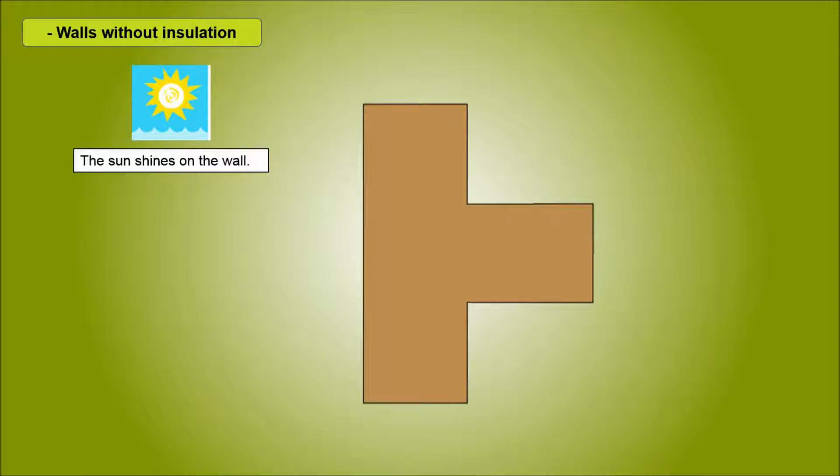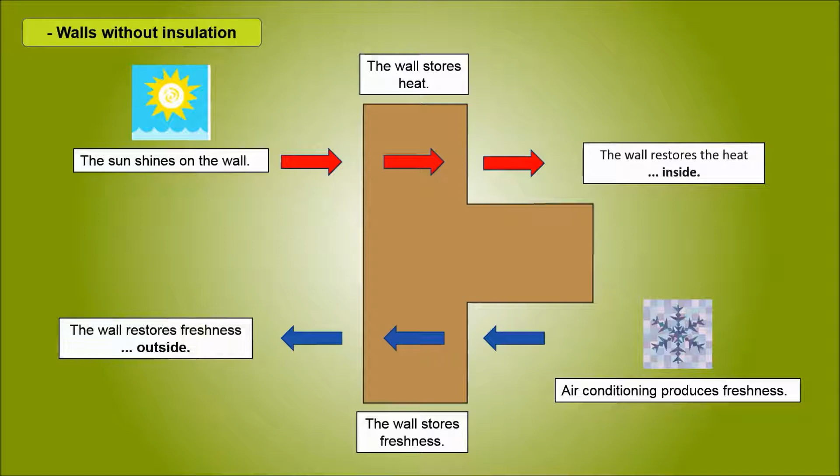Here's what happens with a wall without insulation. The solar radiation hits the wall that stores its heat and restores it into the inside of the building. Conversely, the air conditioning produces cold that will be let into the wall, which in turn will restore it to the outside of the building. That's what we call the thermal bridge phenomenon.

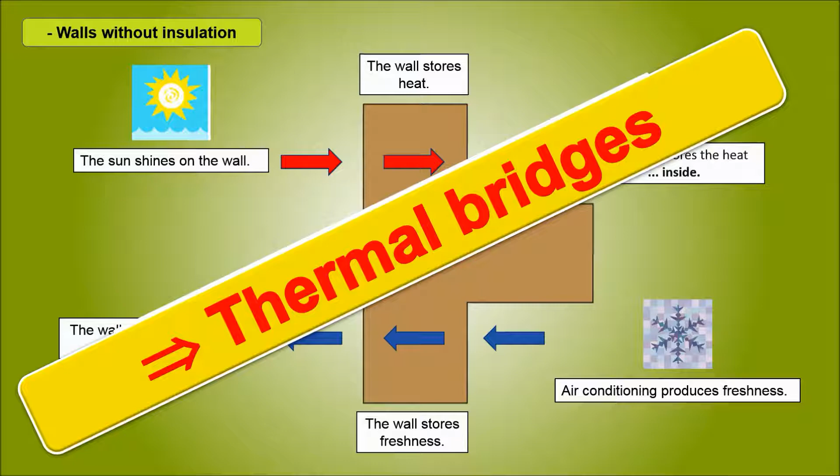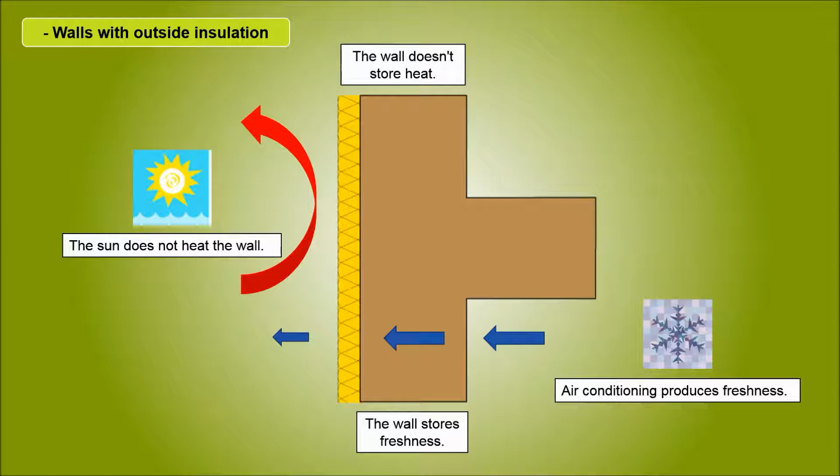So in hot or tropical climate, the building will be warmed by solar radiation and much of the cold produced by the air conditioning escapes to the outside of the building. An absolute nonsense. Outside insulated walls are not hit by solar radiation, but much of the cold from the air conditioning is still wasted and driven out. The phenomenon of thermal bridge is thus attenuated.

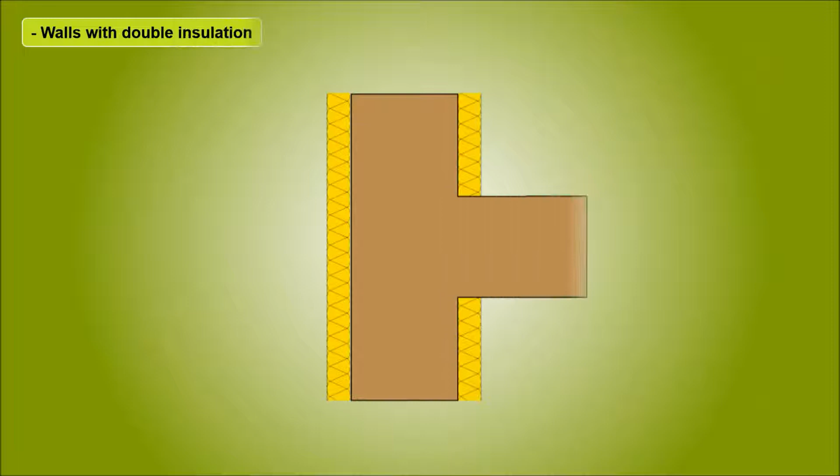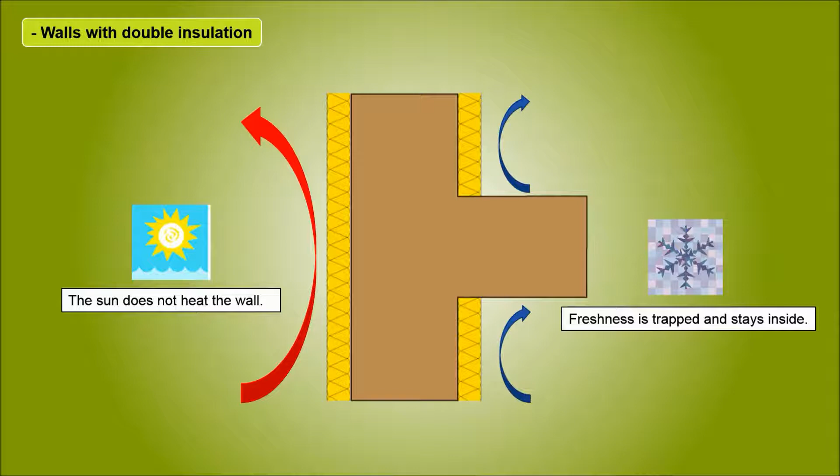With double insulation, outside and inside, the solar radiation does not warm the building and the cold produced by the air conditioning is trapped inside. This ideal building does not know the phenomenon of thermal bridge.

The ultimate goal is to move from a passive building, that is to say, with high energy performances and that does not require heating and air conditioning, to buildings that produce more energy than they consume.

In this perspective, three essential rules must be respected. First, removal of thermal bridges. Second, have walls with high thermal inertia. Third, build airtight buildings with controlled ventilation. Thermal inertia and airtightness, two areas in which the concrete walls are most efficient, better than the brick walls and of course the walls made out of wood, materials without any thermal inertia and absolutely not airtight.

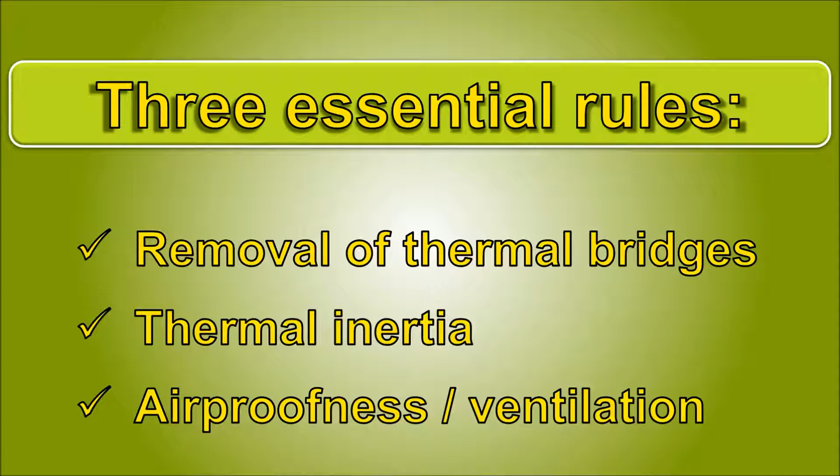Here's a dynamic simulation and a study of the potential of energy savings in air conditioning carried out on buildings located in tropical climate. The chosen geographical location is the city of Chonburi on the shores of the Gulf of Thailand, quite representative for any tropical climate.

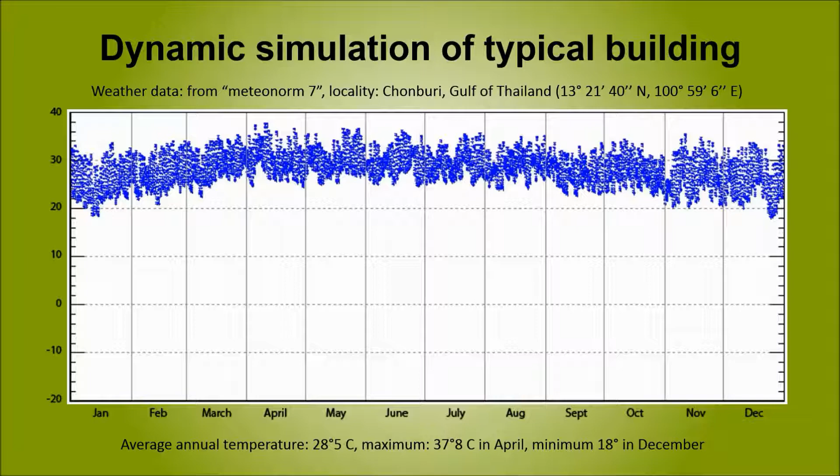We see fairly uniform temperature throughout the year, with a maximum of 37 degrees in April, a minimum of 18 degrees in December, and an average annual temperature of 28 degrees. Vertical solar irradiance is uniform throughout the year.

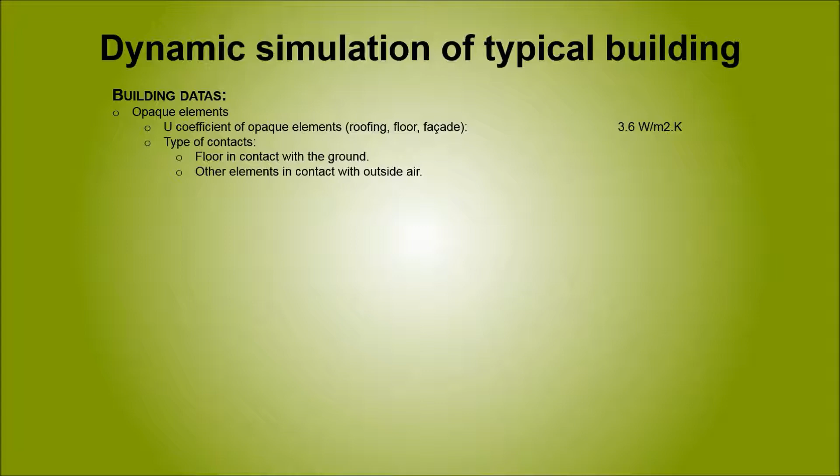All the data of the buildings were taken into account, namely the insulation coefficients of the opaque elements of the envelope and their contacts with the ground and the air, the insulation coefficients of glazed elements and their percentage in the envelope.

Two types of buildings have been studied. The first one, a 10 by 10 meter house with a flat roof, 3 meters high. The second building, a 10 by 7.5 meter house on 2 levels with a flat roof, 6 meters high. And their operating data: the thermal loads of its occupants, appliances, ventilation and so on. All that for a target comfort temperature between 20 and 26 degrees centigrade.

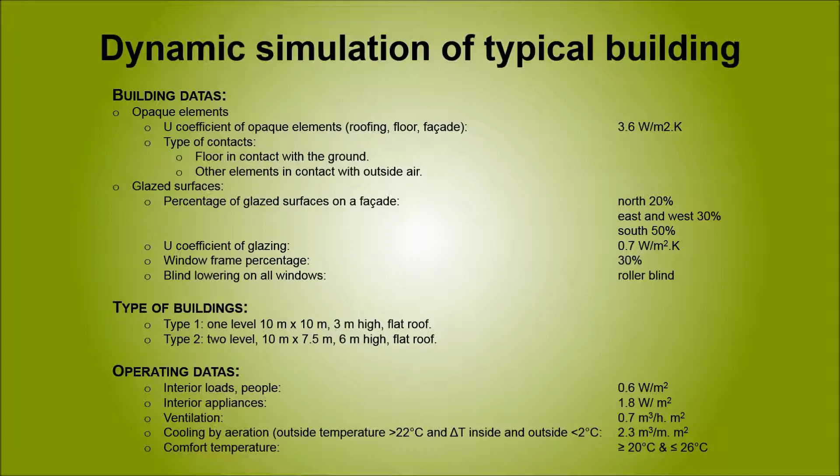A first simulation of a typical building makes it possible to identify the improvement potential of the various elements of the envelope according to their thermal resistance and their respective surfaces. The greatest potential for improvement lies in the facades and in the roof.

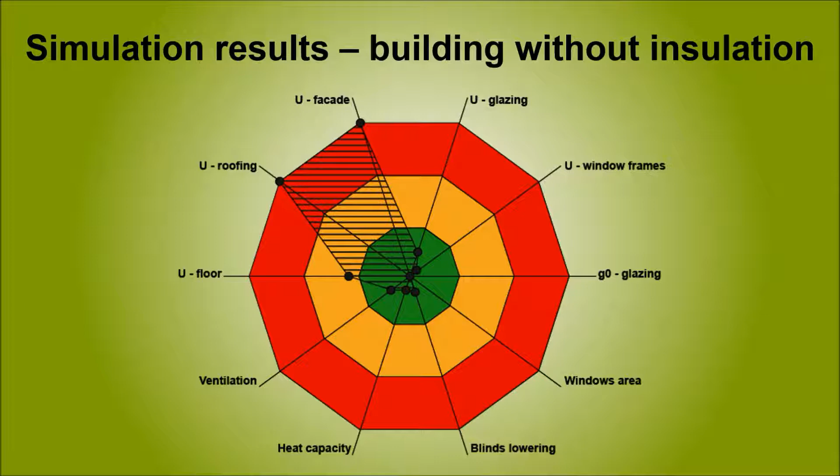For our example, we will take the type 1 building, meaning a house 10 meters by 10 meters, flat roof and one level. It is clear that without any insulation or air conditioning, this building does not consume any energy. Without insulation but with air conditioning, it will consume 100 watts per square meter or 24 liters oil equivalent per square meter.

The insulation of the flat roof will lead to a significant improvement and lowers its energy consumption by 32 to 34%, depending on the thickness of the insulation and therefore its insulation coefficient. The insulation of the facades will also contribute to these energy savings by 25 to 26%, again depending on the thickness of the insulation and its insulation coefficient. The insulation of the floor will reduce this consumption by 6%.

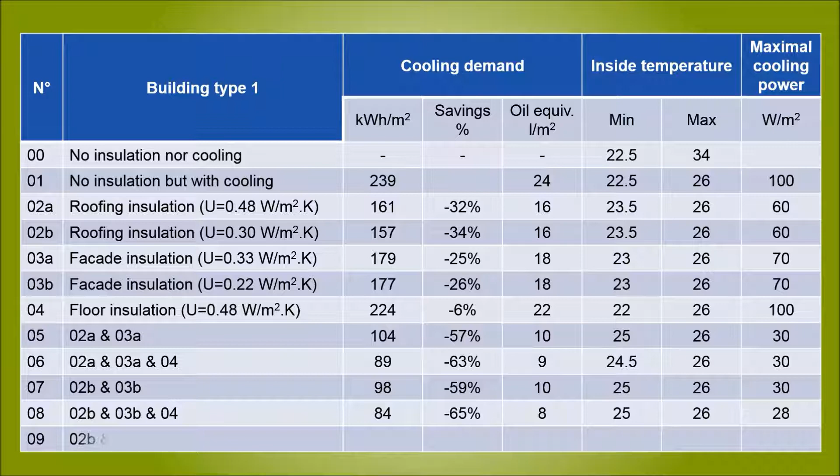The combinations of its insulation elements allow an energy saving between 57 and 65%. Free to the builder or the owner of this building to choose the most relevant combination for its comfort and for its budget, according to the ratio between the investment that the insulation represents and the energy savings on the medium and the long term.

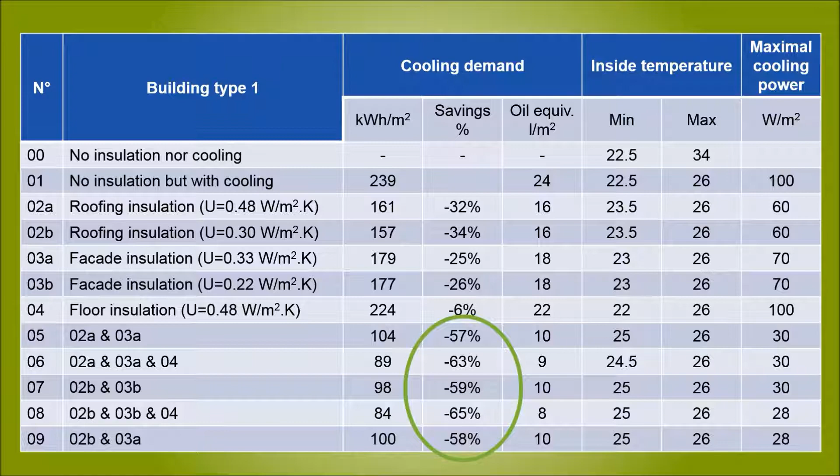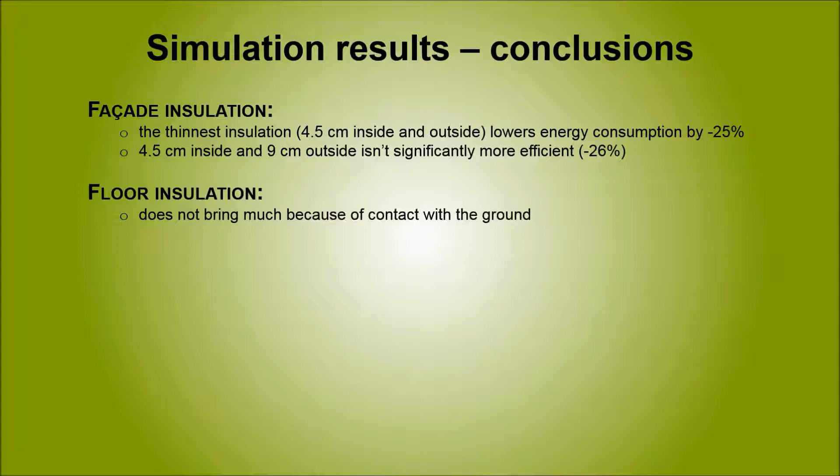In summary, a 4.5 cm outside and inside insulation reduces energy consumption by 25%. A double thickness of outside insulation, that is to say 9 cm, is not significantly more effective. Insulation of the floor contributes only to a small extent because of its contact with the ground. The combination of the insulation of the roof and the facade allow a saving about 60% for a maximum temperature of indoor comfort between 25 and 26 degrees, and the energy consumption of the air conditioning is divided by 3.

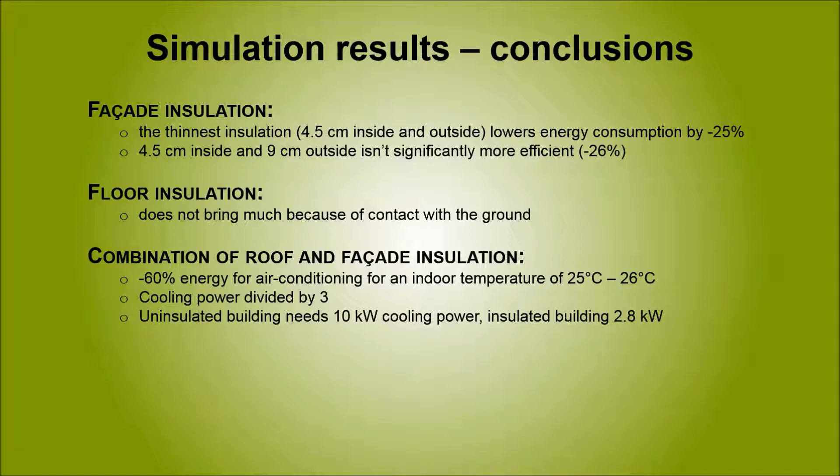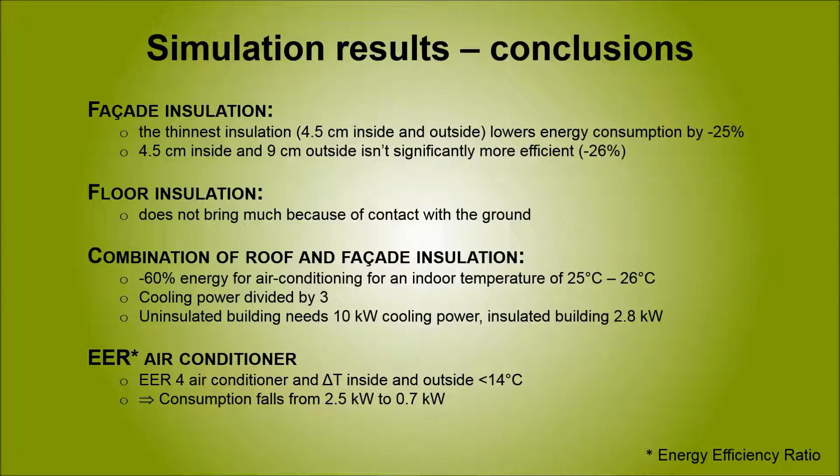An uninsulated building needs 10 kW of air conditioning, a properly insulated house only 2.8 kW. With an energy efficiency index 4 air conditioning system and an indoor and outdoor temperature difference of less than 14 degrees, this consumption drops from 2.5 kW to 0.7 kW. In other words, this building will be able to be air conditioned with the equivalent of the consumption of your hairdryer.

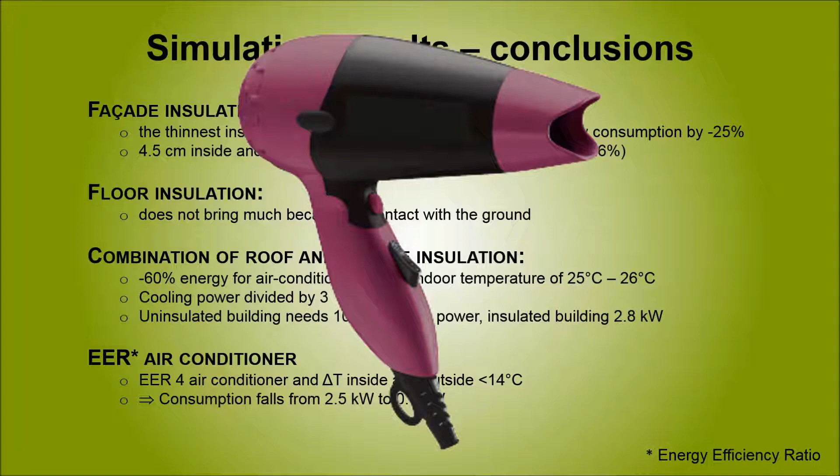For this climate, Euromac 2 offers a 25 cm thick block with 4.5 cm inside and outside insulation and a 16 cm concrete veil. They assemble dry, without glue or mortar, at a rate of 1 square meter per minute, thus significantly reducing labor costs and allowing to go up and pour a floor every 3 days. The dovetail profiles ensure perfect contact and hold between concrete and insulation, between insulation and plaster or coating. The integrated steel structure gives them optimal strength and easy steel reinforcement placement.

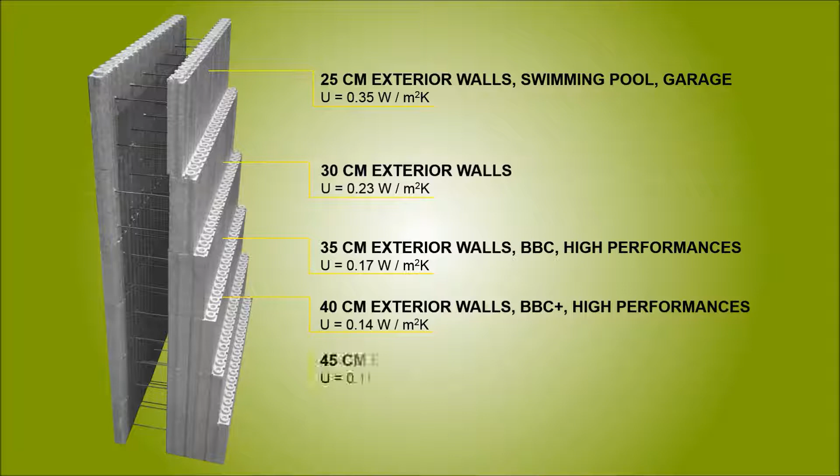Floor-level poured concrete offers excellent thermal inertia, airtightness, and optimum sound insulation. The complete range of Euromac 2 blocks adapts to all climates and uses, depending on the desired thermal coefficient. Euromac 2 is the unchallenged leader for buildings with high energy performances.

Euromac 2 is actively looking for a partner for the manufacture of its product in Southeastern Asia and offers exclusive distribution on the partner's territory, the complete real-world test of machinery and equipment before delivery, collaboration for the market approach, its parameters and local potential, advice for sales techniques, a presence on the internet, marketing and communication, the management of sales forces and logistics, technical assistance for customers, assistance for local certification and regulations, long-term commercial and technical support.

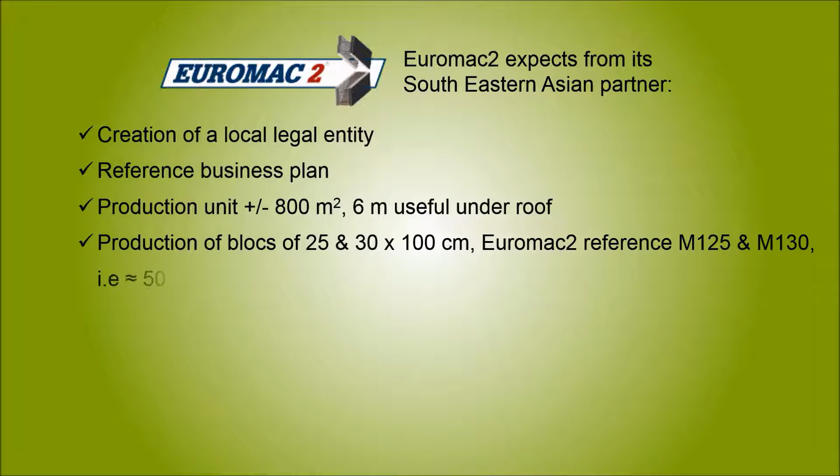Euromac 2 expects from its partner the creation of a local legal entity, a business reference plan, a production unit of more or less 800 square meters on the ground and a useful height of 6 meters. The annual production of blocks of 25 or 30 centimeters on 1 meter for 50,000 square meters of wall, equivalent of 300 to 500 housing units. An investment for the manufacturing unit of 1.5 million euros or 1.7 million US or 39.6 billion dongs. Management of local elements, terrain, infrastructure, regulation, administrative aspects, etc. Active marketing in his territory, royalties on production.

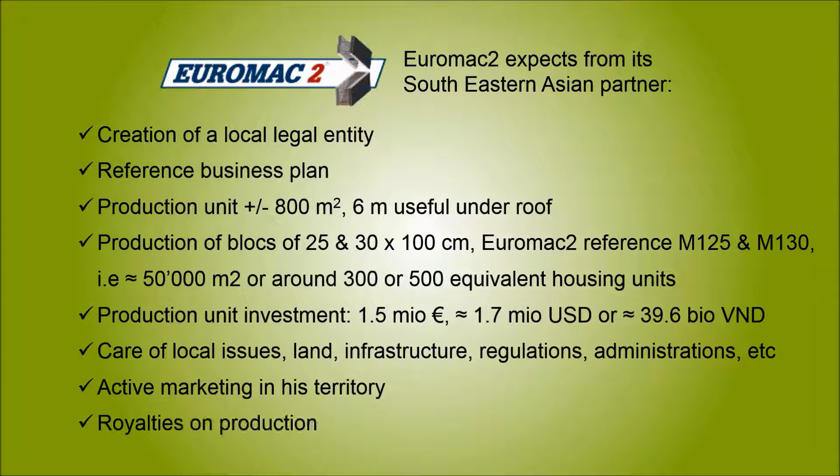Euromac 2 today: a design and customer support team, a registered training center, R&D in partnership with EPFL, Polytechnic University of Lausanne in Switzerland, more than 100 employees, 20 million euros in annual turnover, up 50% every year, one of the 60 best SMEs in France, factory direct sales to professionals and private customers.

Euromac 2 is the leader in passive construction and high energy performance for residential, commercial and industrial buildings, 40 years of innovation and experience, 40,000 constructions completed, more than 1,500 projects a year, the only manufacturer to offer a global wall, roof, slab solution under German Passive House Institute certification.